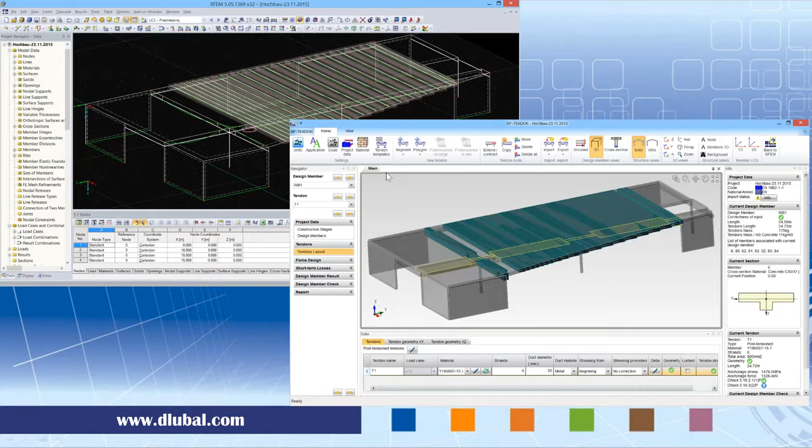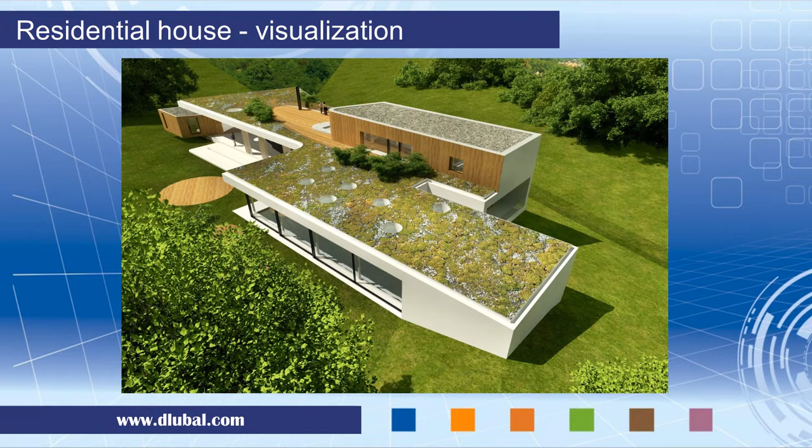When I was thinking of what kind of example I would show, I was inspired by this residential house. You can see the visualization of the house, which was built some years ago in the town of Zlín in my country. This is a family house, but a quite big one. The length of the house is about 50 meters, and the width is more than 25 meters. And I was involved in the analysis and design of this post-tensioned slab, which was part of the floor of the roof of this house. You can see now the tendons designed in the slab, and we can also see the final structure which was cast.

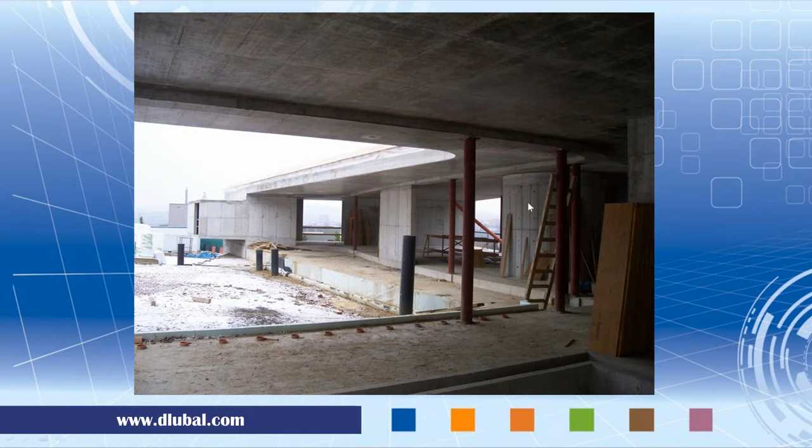It is quite a long span with a cantilever of more than 4.5 meters, and especially because of this cantilever we needed to use pre-stressing in this family house.

I will start my live presentation in RFEM. We will show what is necessary to start pre-stressing analysis in RFEM. So first of all, you have to define load case type pre-stressing and some load combinations, and also result beams and ribs and slabs.

I will switch into RFEM, and we see that if I go to load cases, I defined a pre-stressing load case here, in which we store not only the equivalent loads but also the results caused by the tendons, caused by the pre-stressing. Other load cases which I did in this example were self-weight, snow, and the roof.

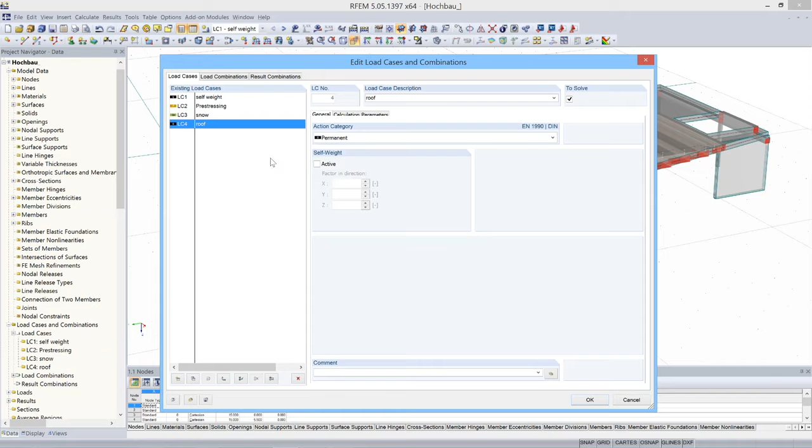In pre-stressed concrete, you should realize that your unit weight of concrete should be a little bit higher than 25 kilonewtons per cubic meter. Either you really calculate it based on the amount of reinforcement, or you simply use 25.5 or up to 26. So that's what I adapted.

Then we can see the combinations, and I defined several combinations. We can of course define more of them to make the analysis more powerful, but this is the necessary amount which I did. All types, ULS and SLS characteristic, frequent and quasi-permanent, are used for the design.

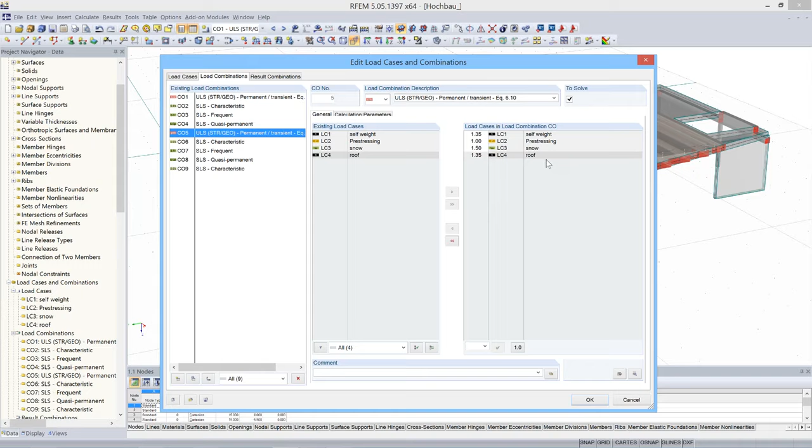And you can see that the first set of combinations contains only self-weight and pre-stressing. That's because we want to analyze the moment when the structure is pre-stressed before any other load is applied. Then I have a different set of combinations with self-weight, pre-stressing, snow load, and the roof. So that was it.

And last, which I want to show, is this model. You can see that I have defined some result beams, and the result beam, if I select one, is, I would say, a dummy member or fictive member defined in the slab. If I open this dialog, we can define the area from which RFEM integrates internal forces from the slab into this fictive beam.

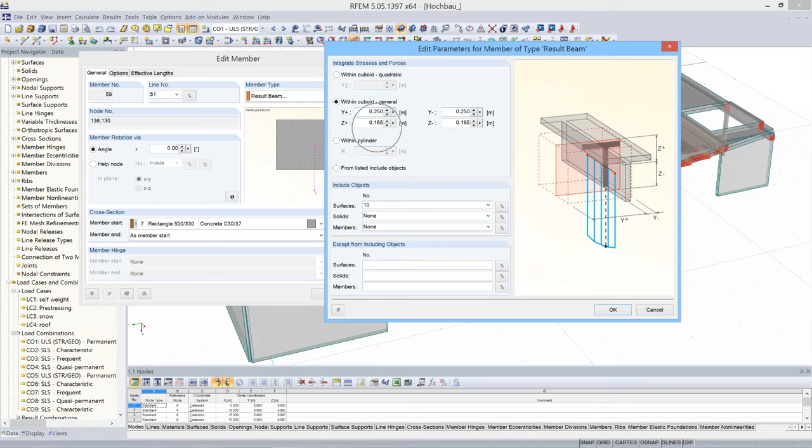So you define the depth of the cross-section plus minus and also the width. You can also define a different cross-section for the analysis and the design. As you can see here, we have these result beams here of the width half a meter, and here we have 1 meter. That's because the cantilever here is much longer, and that's why we needed more tendons.

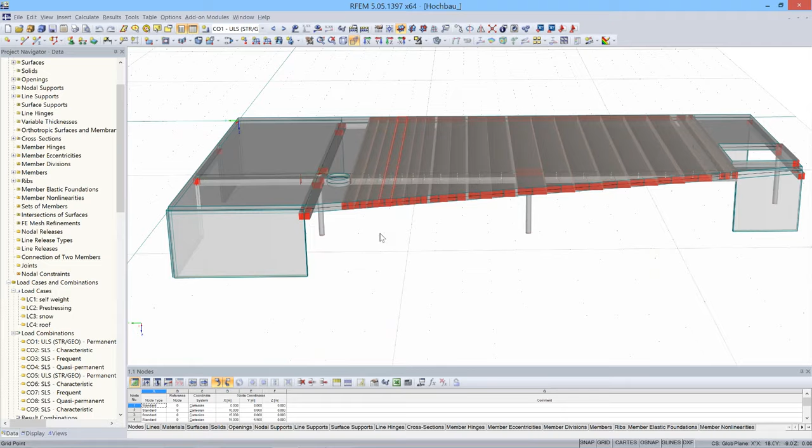If I switch into wireframe model, you can see these green lines, which are the tendons, and you can also see that the tendons are here distributed per half meter, and here the distance of the tendons is higher.

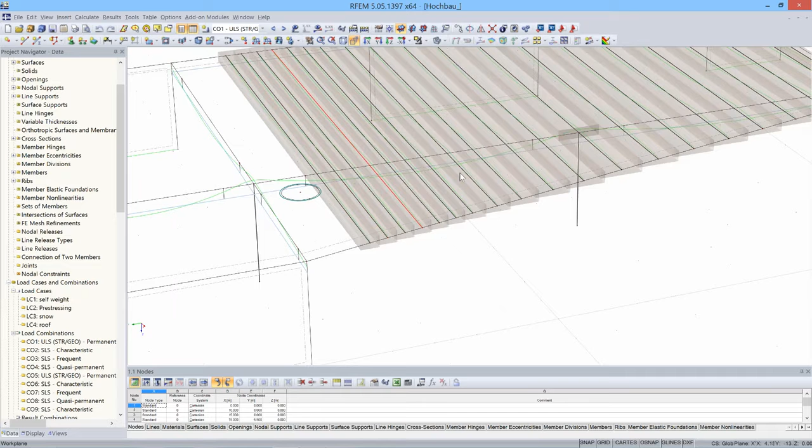The last one which I want to show is this beam and slab system. You can see here that I have a rib which is linked to the slab, and RFEM can integrate internal forces from a defined width of the slab together with the rib, and we can get a T-section, which is then used in the analysis and in the design.

So next, what I want to show is RF-TENDON and the functionality of RF-TENDON, like tendon geometry, pre-stressing losses, and effects of pre-stressing. All the data from the model is uploaded to the external module, and we will see this shortly.

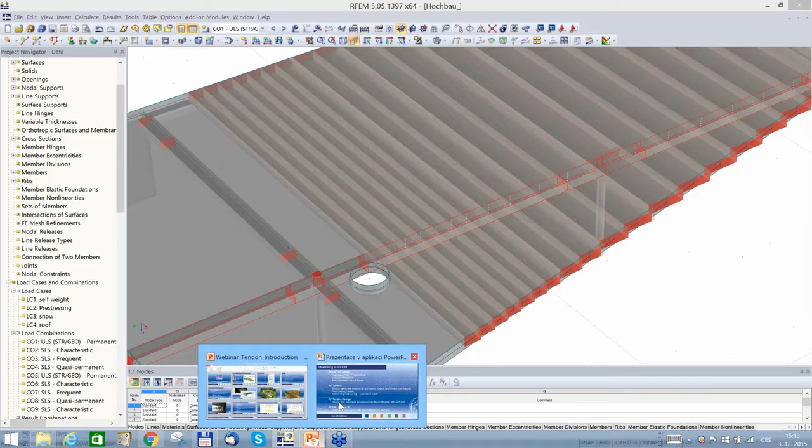After RF-TENDON, I will show RF-TENDON Design, and we also have the possibility to use all other functionality of RFEM, like the nonlinear analysis of the slabs and so on. We have it already here.

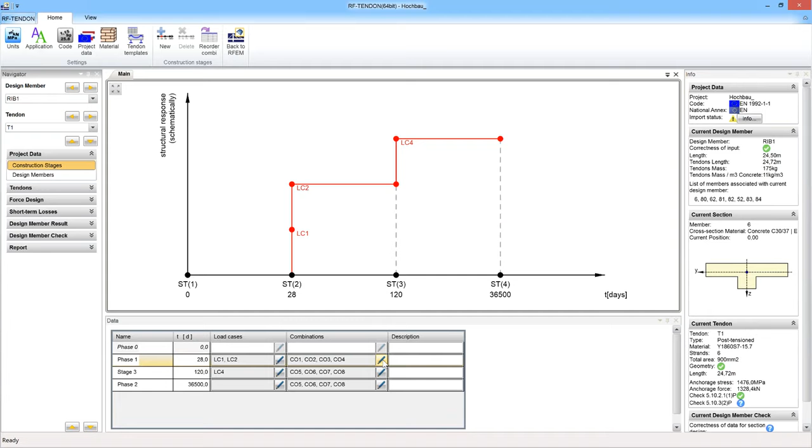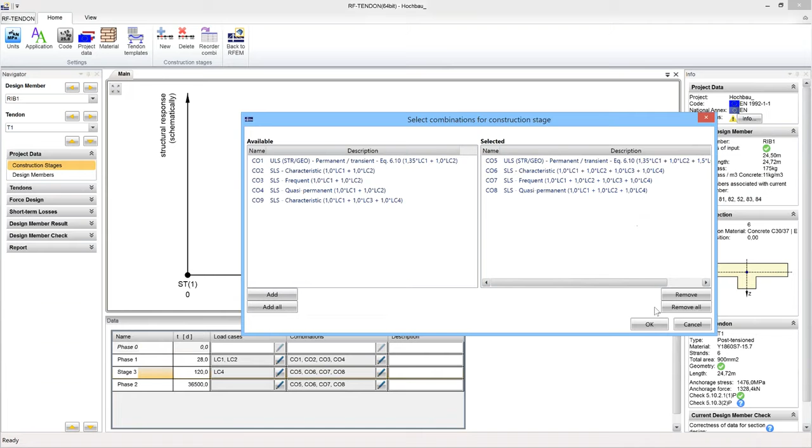And in the definition here, you can, of course, add any combination which contains those two load cases plus possibly some live loads. The other combinations are combinations 5, 6, 7, 8, which also contained the dead load caused by the roof. Then we can define the design members, and I already defined the member.

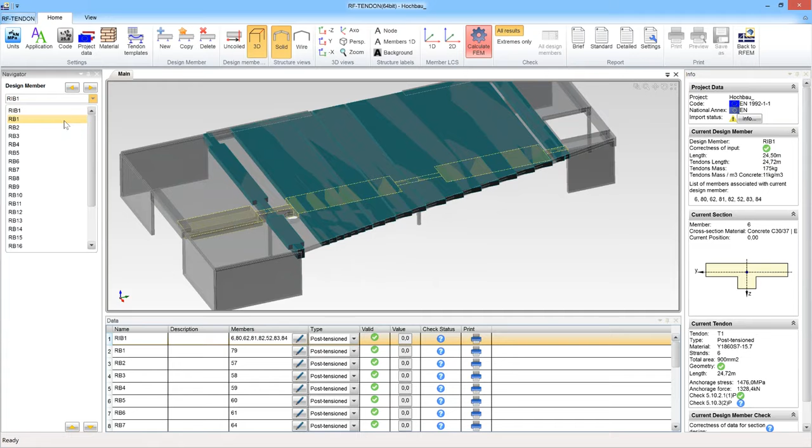I can show this 3D view, and you can see that I defined this beam and slab system with no slab above the supports and with effective slab width at mid-span. We can also go to any other result beam, for example this one, which we have defined in RFEM. You can pick up the members.

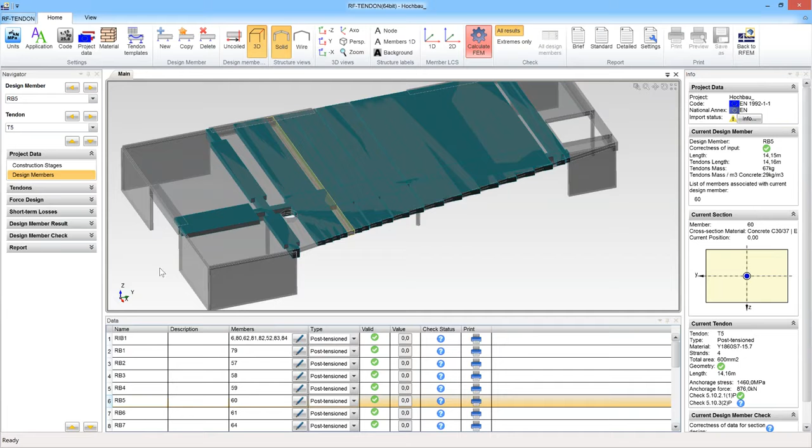You can see, for example, this rib is composed of many members. So if you edit, you can select the members from RFEM. In case you have a curved beam, we can uncoil it so that you can comfortably work in a 2D environment and analyze a 3D tendon.

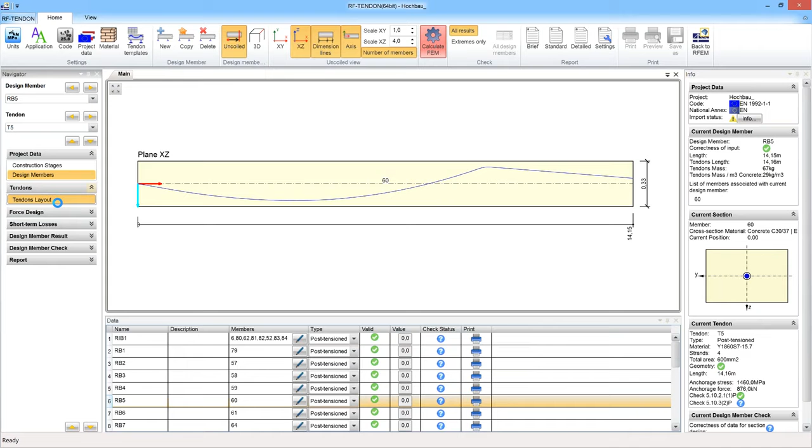In case of pre-tensioned beams, you define here in this dialog the parameters of the stressing bed. Then we go to tendon layout, and we can see now the XY and XZ projections.

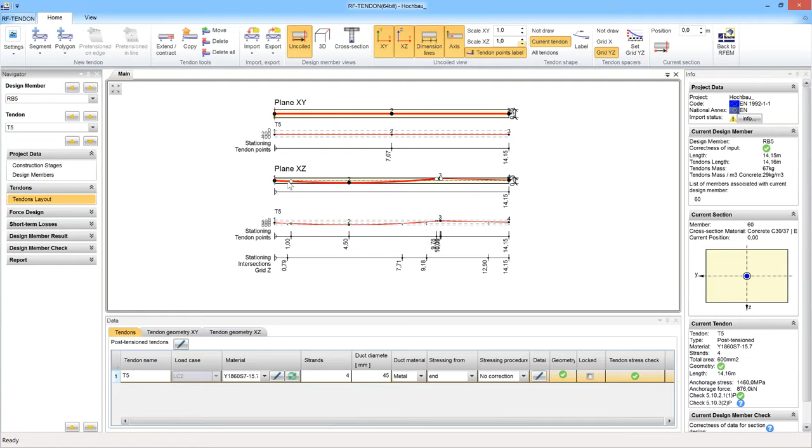And if I want to make the beam in the real scale, then it looks like this. This is the plan, and this is the longitudinal section. If I switch off the plan because I am not interested in that, that will be the straight tendon, and then I can scale it in vertical direction so that I can work with the geometry of the tendon comfortably and with no problem.

At the beginning, I define the material, number of strands, and also other properties like from which side we stress the tendon, material of the duct, and other things. But I can also select one point of the tendon, then I can switch into geometry XZ, and if I switch the drawing here, then I can get a nice explanation of the parameters, how this point of the tendon is defined. The distance is 40 millimeters based on the concrete cover.

From the formwork, this type of tendon geometry which I use is composed of two segments. Both are closing segments because there are only two. The first is parabolic and straight on the left hand side, and the last one is this one, straight on the right hand side.

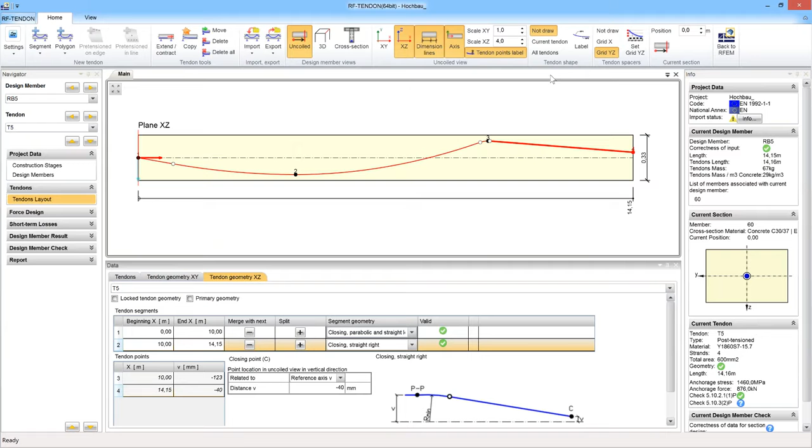The last thing which I wanted to show here is this drawing of the tendon along the length. Maybe I can switch on the labels, and then you can see that by defining these levels from the bottom of the beam, especially from the formwork, I can define the distance at which the spacer with specific depth should be placed. For example, the spacer which has 300 millimeters will be placed here at 9.18 meters. So the program calculates it for you.

That's it. By composing 2D and 2D geometry together, we can get this 3D geometry, and what's more, if the beam is curved, after we coil it back, we add this coiling to the 3D geometry, and you can have such a tendon. So you work in a 2D environment and you have a 3D tendon. And then we calculate the equivalent load, and we can display the load.

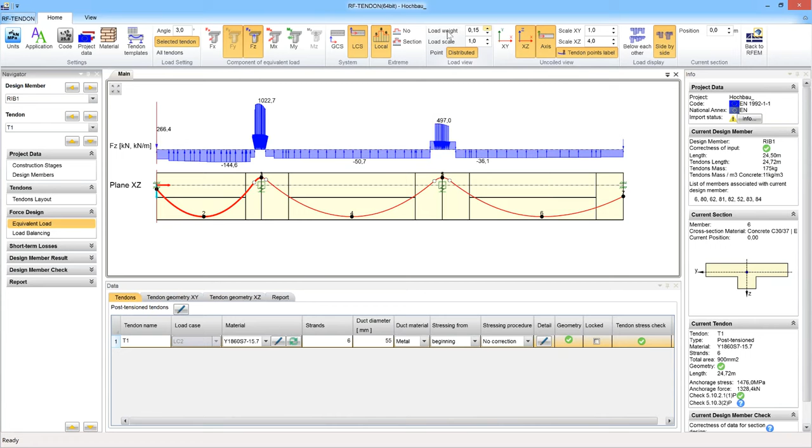Also, if I select the other rib, for example this one, then you can see that it is a little bit more complicated. You can play with the load weight. This is not a real scale. This is a real scale, because above the support we have a very small radius. So you see that intensive load above the support in this small parabola. But if we want to see this equivalent load better, then you use this load weight. All these settings on the ribbon are shown in the graphical tooltips.

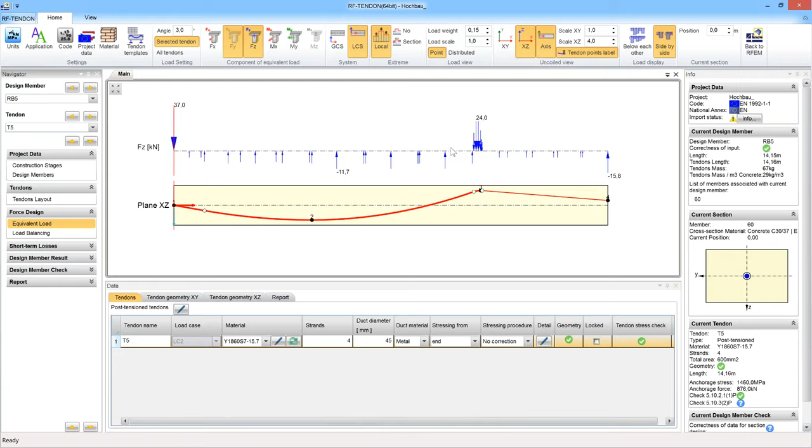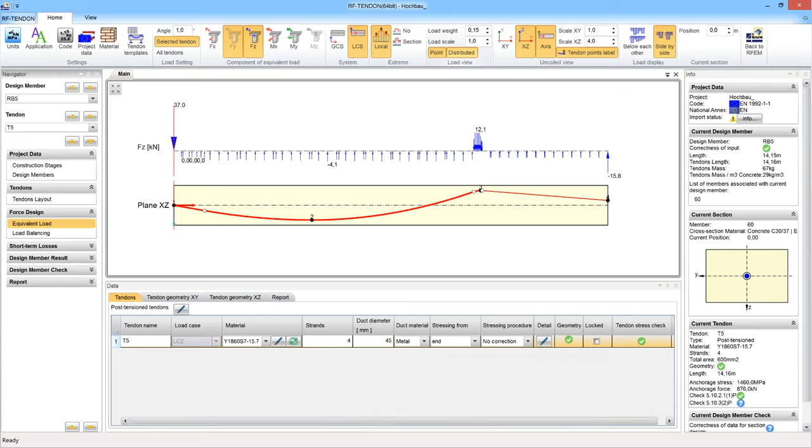If I switch back to this beam to have it a little bit simpler, then I can show that you can see not only distributed loads but also point loads, and this is calculated from the deviations of the tendon along its length. After we calculate this, we distribute it into distributed loads. You can also influence the precision by setting, for example, 1 degree here. The smaller the angle is, the more precise the equivalent load you calculate. But if it's too small, it makes the calculation longer, of course. I can keep 1 degree, and we get quite a nice equivalent load.

In some cases, for example in 1D elements, you can also use the functionality of load balancing for the design of tendon force. As we now have the slab, there is no direct load, I mean load per meter. We have load per square meter only.

So the functionality cannot be shown in here, but the principle is that you balance the selected external load, for example self weight, or you can also make the combination of self weight and additional dead load, and you balance it by the equivalent load caused by the pre-stressing. And authors like T.Y. Lin or some Swiss professors advise that you should balance approximately 100%, and if you design to the Eurocode, then probably a little bit more percentage of these dead loads.

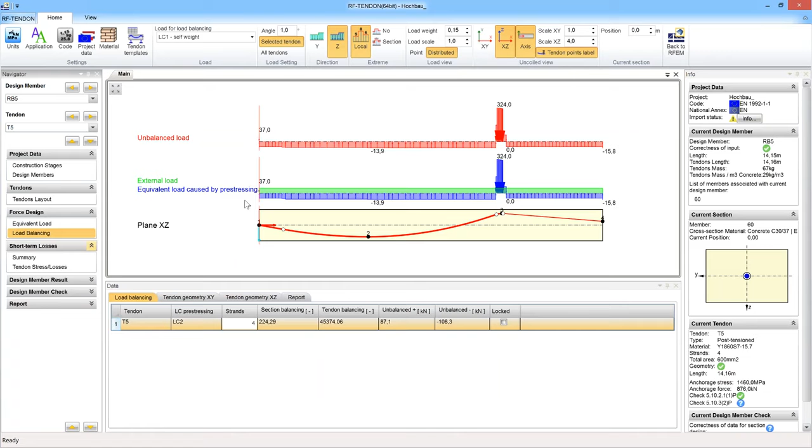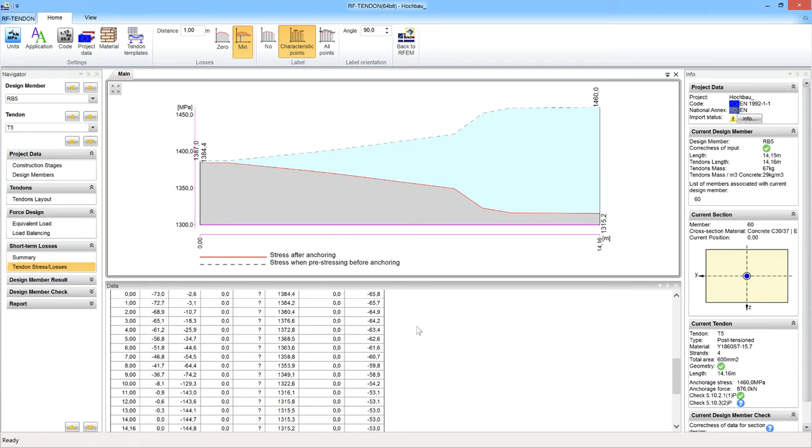After we have this defined, we can go to short-term losses. You can see these losses, also the checks of the tendon according to Eurocode and German Annex. You can also have the summary of these tendons, in which you can read and display all the necessary information, like minimum radius, the area of tendon, sum of lengths of straight and curved parts, cumulative angular angle along the length, and all these useful parameters.

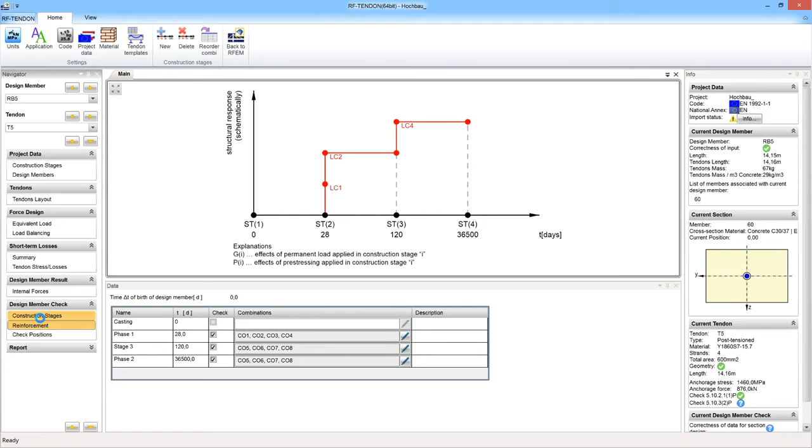Design member results can be shown if we calculate RFEM, but before I do it, I want to explain. This is again the picture of construction stages, which actually can be used if you have different age of the beam in your complex 3D structure. And here we have the reinforcement zones. I have defined the reinforcement, of course. You can see the tendon here.

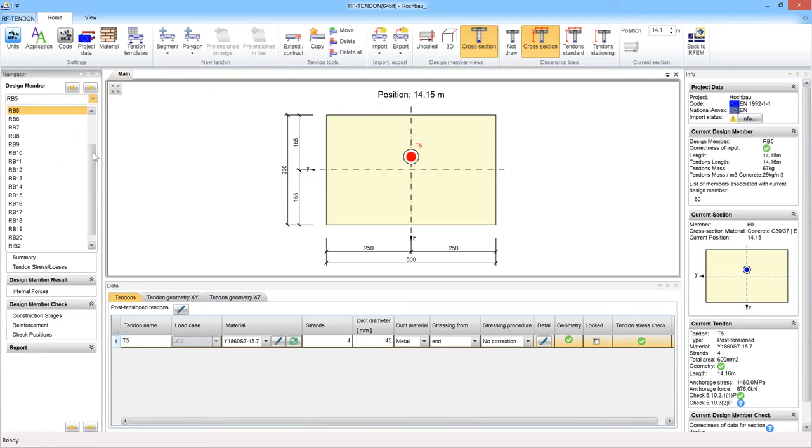Maybe I didn't show here in tendon geometry. Sorry about that. In tendon geometry, I probably should show this cross-section. You can see how the tendon goes by selecting the position of the tendon. Also, if I select the first rib and slab, and I go like this, you can see the change of the cross-section above the support. So we can check it. You can check it also in 3D.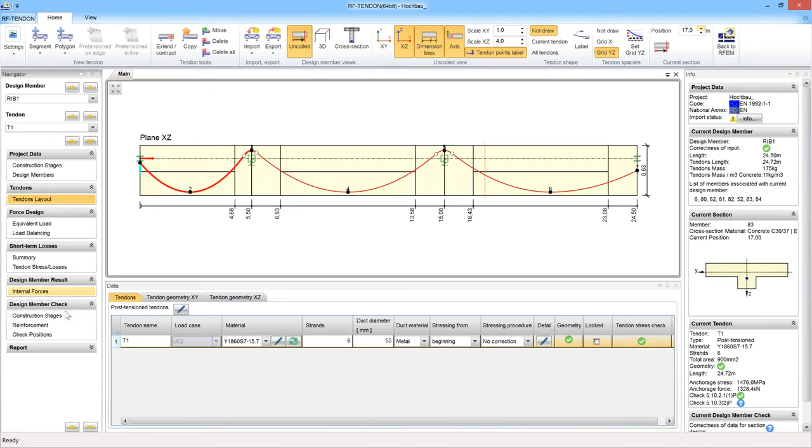Now I go back to the reinforcement. I switch into a more simple rib beam, and we define. Of course, we can add any number of zones. I believe that these can be sufficient for this case, and we can define the check positions, and in these positions we then check the cross sections. So I selected the positions above the supports and at midspan.

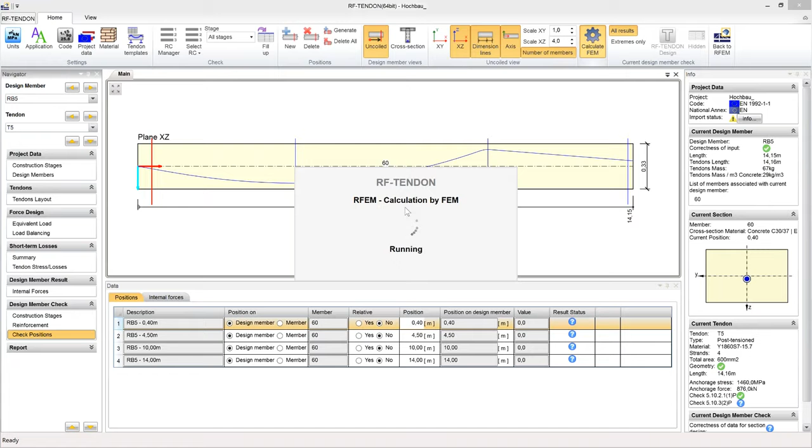Now I press the button calculate FEM. In fact, the external module uses the RFEM finite element engine, and we will get the results of all the load cases and combinations soon. It's not a small structure, but it takes reasonable time, so we will see it in a minute. And in the meantime, I will see if I forgot something.

So we went through the segments of tendon geometry. We explained all the possibilities of polygonal, and now it is finished. I finished this one. Export and import, pre-stressing losses, effect of pre-stressing, and all of these. Now we go to tendon design. We design the cross sections.

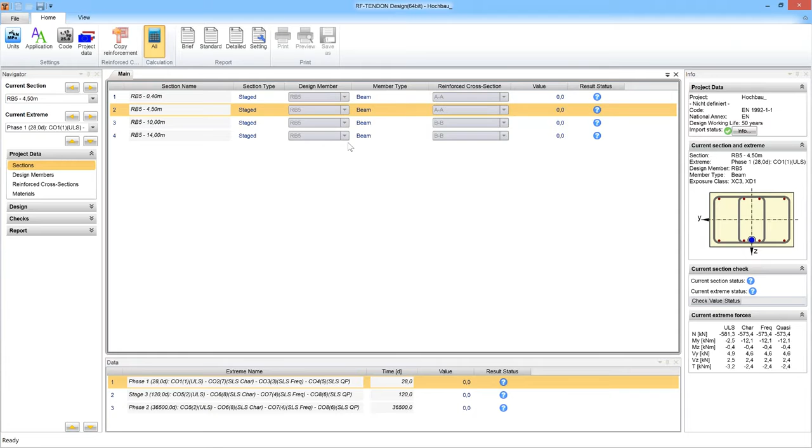In these pre-selected sections, we can go to RF Tendon Design, and all the data is prepared from the construction stages, from pre-stressing, and we find the cross section in selected sections, and then the data is generated. Now we have 4 sections. This is above the support. This is at midspan. Again, above the support, you can see it in the info window, and this is, I think, at the end of the parabola. I can calculate all these sections, and as I already designed it, you see that it is satisfactory, 99% above the support. Let's see some results.

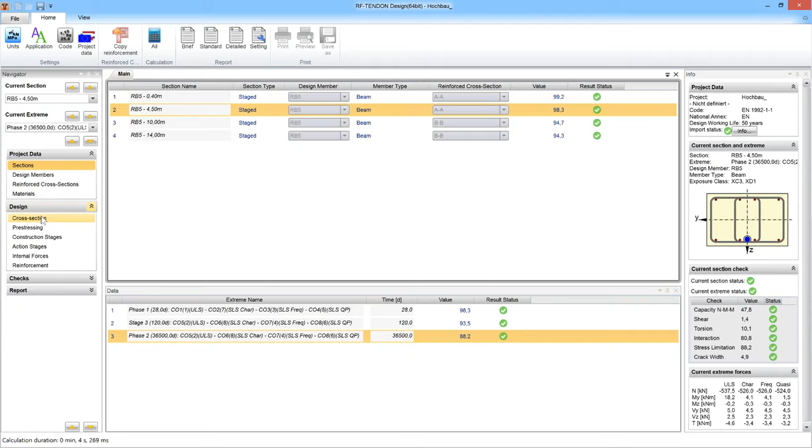Here we have individual construction stages. Stage at the pre-stressing, then when additional dead load is applied, and at 100 years. I will skip these data which in fact were filled in. You see, for example, these construction stages were uploaded from the module. You can see how it changes, but we cannot change it as it was imported from RF Tendon. But it is for your information.

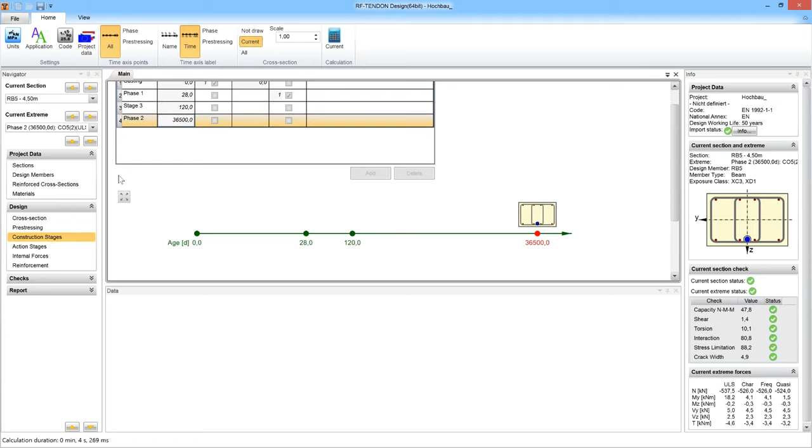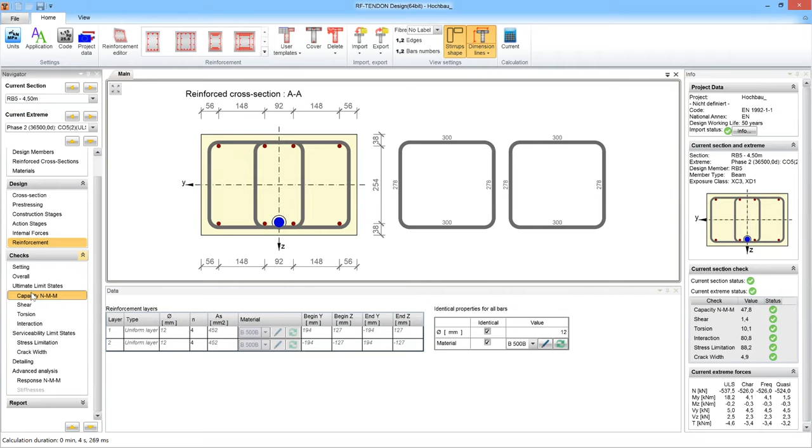Also action stages, internal forces, there are all the losses and forces shown, and here you would define the reinforcement. There are quite nice possibilities for the definition of the reinforcement, and you can see the reinforcement, how it goes. But let me explain these checks, concrete checks. First we have capacity, in which we show the capacity against flexure and normal force in an interaction diagram. Of course, you can see many possibilities on the ribbon.

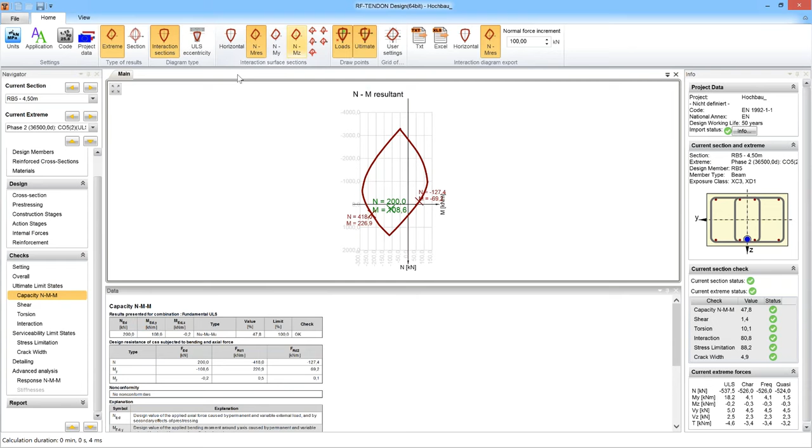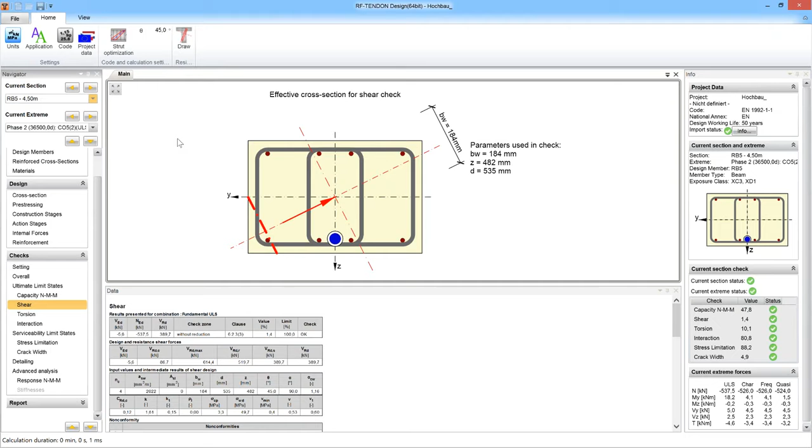Shear analysis. Here it is interesting, and I wanted to show you that if we are at midspan, then the longitudinal shear is even bigger than the vertical one. You can see the direction of the shear force, and also the effective width of the slab. So we need stirrups in both directions. If we select the section above the support, then you see that this direction of the shear force is vertical, and this one at the end is even bigger. This is almost completely horizontal because of the shear lag.

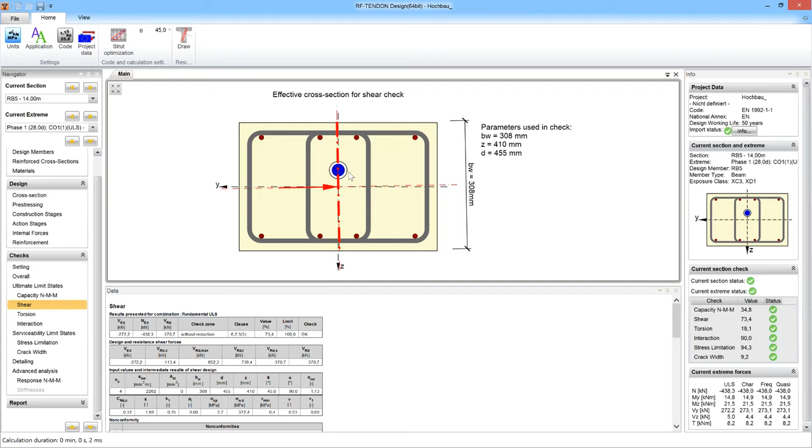If we apply a high normal force of pre-stressing, then of course just behind the anchor we should not use the sectional analysis. It is the anchorage zone, but I don't think I made it immediately after the anchor, and still RFEM integrates quite significant forces, but we can design them with no problem. So let's go back to the midspan. Oh, maybe I should have shown this torsion above the support, but doesn't matter.

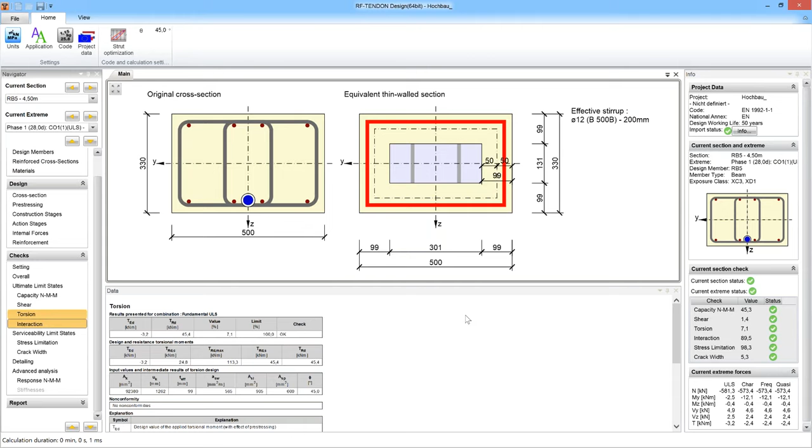We have also the possibility to analyze the interaction of all internal forces, which I will explain later, especially during the webinar. Stress limitation, concrete, pre-stressing reinforcement and non-pre-stressed reinforcement, crack width. Then some advanced, we have the possibility to check the detailing, but I switched it off. Here in settings you can switch it. Oh, this is not switched now, but sometimes you have to switch it off

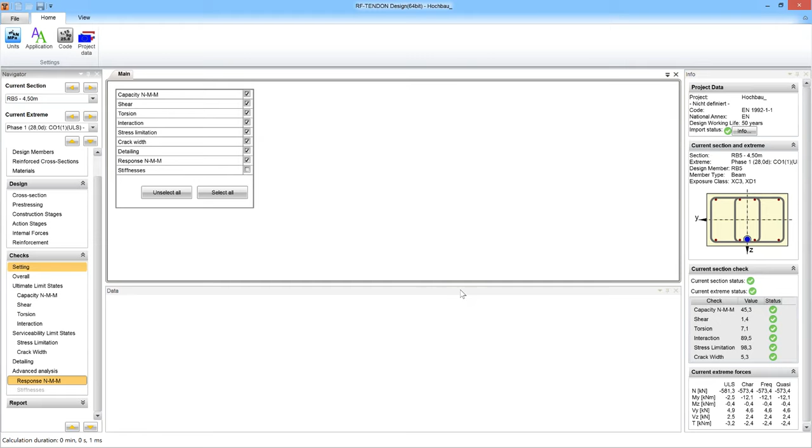because you do not provide a real reinforcing cage. And the response or stiffnesses, response I can show here, and you can use this response to show all these stages. So that was at 28 days. You can see that there is quite significant pre-stressing at bottom fibers. Then at 120 days we have some losses already, and also higher load. So this is smaller, and at 100 years it is even bigger difference.

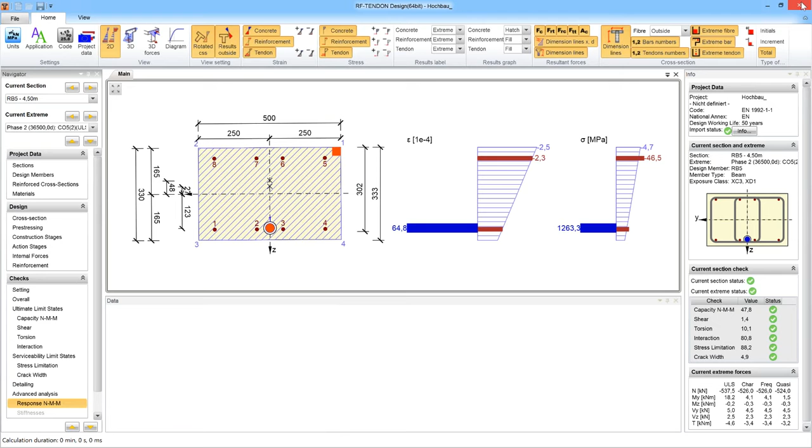When we are happy with the design, then we can go back to RF Tendon, and we can switch into, for example, this rib, which was more complicated with a complicated section, and again you define the sections which you really want to be analyzed and to be checked according to code, and the program again generates the data. In this case, I found a small problem with... I can calculate all with the stress limitation. You will see in a second.

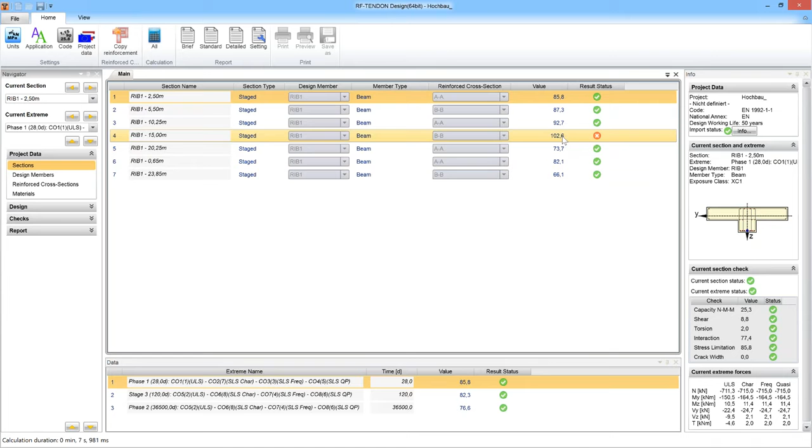So now we have here the progress bar, and it shows you it's already done, what calculation is being performed, and here we have 102. So how to check it? This is a section at 15 meters. You see it selected here, and the check which is not satisfactory, only by 2%, 2.6, is stress limitation. Then we go to checks, and you select stress limitation, and we see this is the fiber in which the ratio of stress and stress limit is critical, so is extreme.

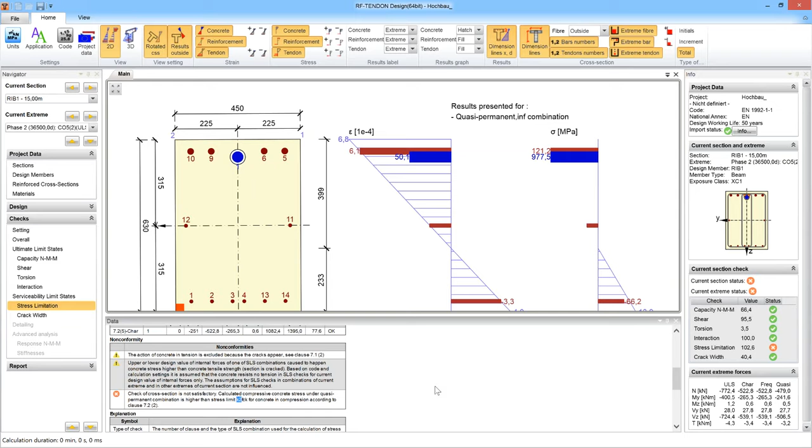We can also make this bigger. There is 13.9 megapascals, and it should be 13.5. The program tells you exactly what is happening in the cross section, and sometimes, if it's straightforward, it gives you some non-conformity. For example, check of cross-section is not satisfactory, calculated compressive strength under quasi-permanent combination is higher than stress limit, and so on.

You can either increase this K2 factor in case, for example, that it happens during the pre-stressing in the fibers where you have the pre-stressed tendons. Then due to the fact that you measure all the forces in the tendon, you can afford to decrease R sup and R inf factors. But in this case, it is at the end, you can see that it is the phase at 100 years. And in this case, either we say, okay, 2% is not that big problem, or we would have to increase the depth of the cross-section, or we can also increase the concrete grade.

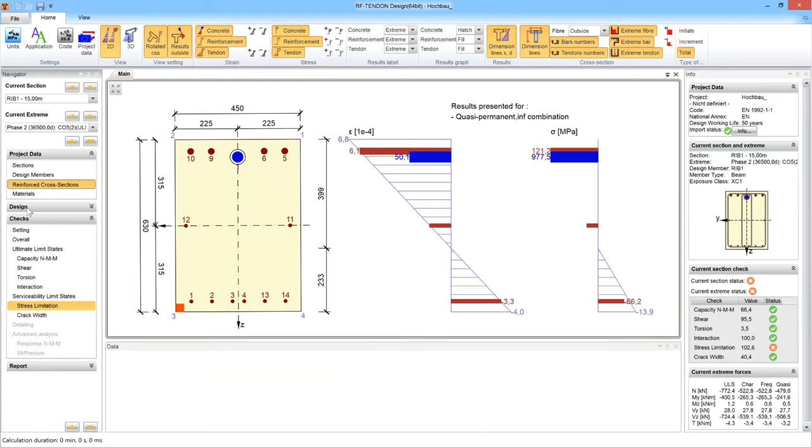The other possibility would be if we go to design and reinforcement, then I can select, zoom all. I can select this layer, and instead of diameter 12, I can try to use diameter 14, and I calculate current extreme, and I see that it is only 0.9%, so we can play with it. Maybe diameter 16 would be okay, and it seems it would.

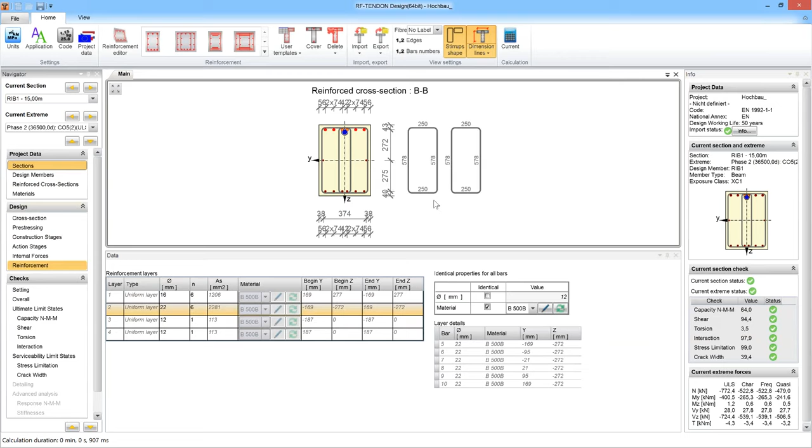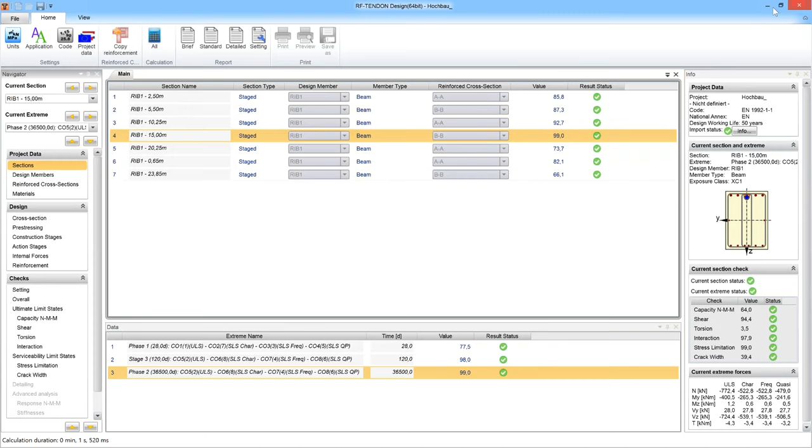So if we go back to sections and we calculate all, because all the data of that reinforced cross-section was deleted, then we see that the rib in this case is satisfactory. Maybe we can go through all these navigator items, but I would prefer to finish the example, and we can concentrate on that in some other webinar or seminars. Of course, we can generate reports both in RF Tendon Design and RF Tendon, but I think as the example it was enough, and we can go further.

So I explained the design, or I would say sectional assessment or sectional check in result beams and ribs, but you might object that this is a 2D member, this is a slab. Then, of course, once you have designed these 1D fictive members, then you get some non-pre-stressed reinforcement as an additional reinforcement, which has to be put into the slab. And you can also use the functionality of this external module, which puts the equivalent loads back into RFEM as upward loads.

And now you have one load case, like for example self-weight, which acts downwards, and of course pre-stressing acts upwards, and you can perform the analysis of 2D members, I mean 3D structure with the slabs, and you can also perform 2D design directly in RFEM. And after you have this potential additional reinforcement, additional to the one which we found in result beams, then you can also perform this non-linear analysis of 2D structures, 2D slabs. We definitely will show it during the seminars.

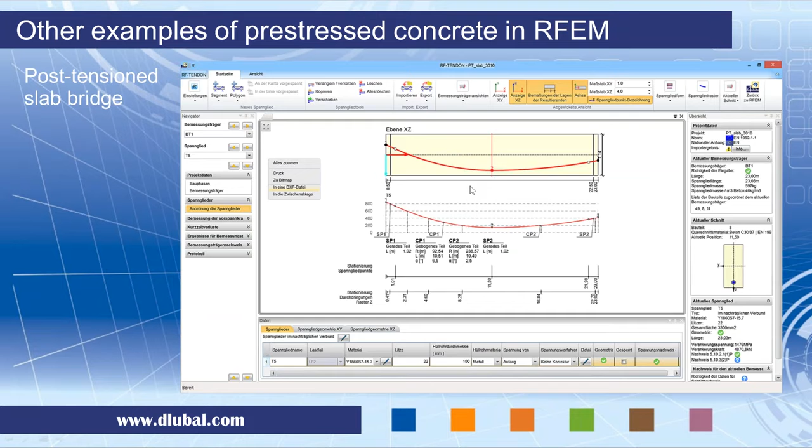I defined it exactly according to that textbook, and then we can get the results in RFEM back. This is the effect of pre-stressing and the upward deflection, and this view from the bottom of the bridge.

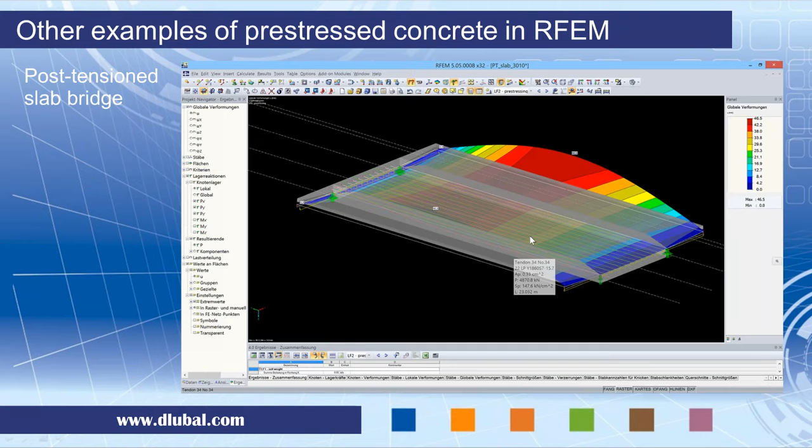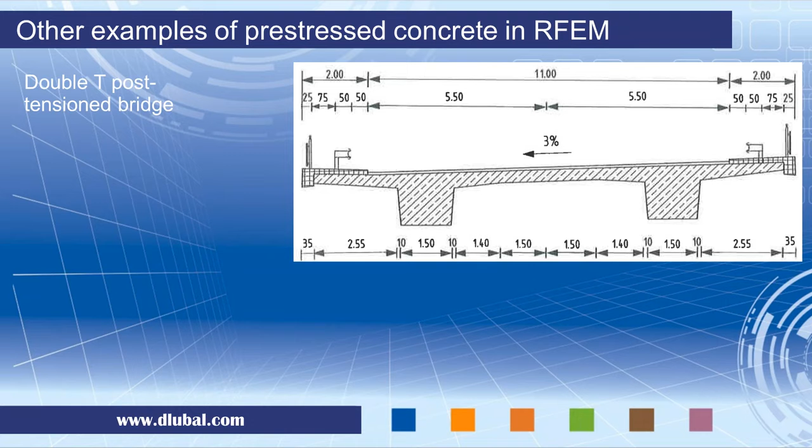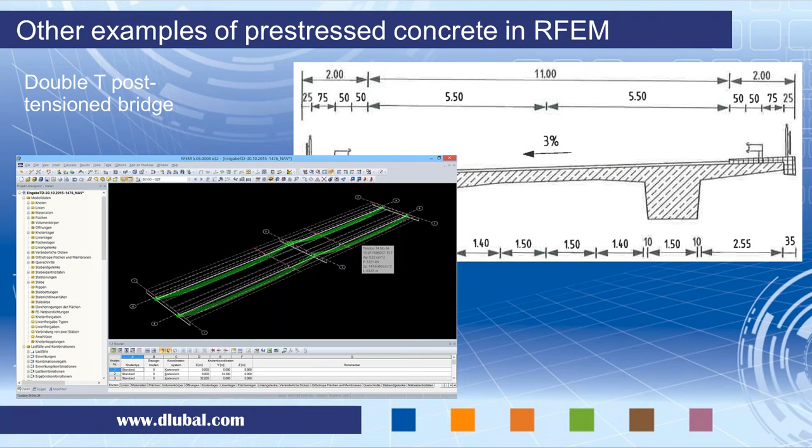Another example which we made, actually Adrian Langhammer input, is a double T post-tensioned bridge. This was from a German report which I do not remember the name, but Adrian then can tell us. This double T post-tensioned bridge was modeled in RFEM as two independent beams which were linked together by an orthotropic slab. The slab had zero stiffness in longitudinal direction, because in longitudinal direction we had these beams, but it has some stiffness in transverse direction to make sure that those beams share the load applied only on one of them. So that was the model.

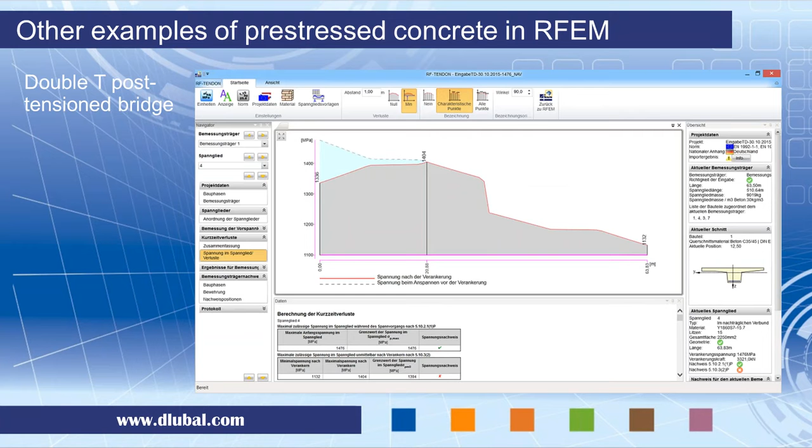Of course, we designed, you might have seen in the previous picture, the tendons. We designed the tendons and calculated losses and all other checks. You can see the checks in RF Tendon Design. First was a flexure check, and then shear, and also here the torsion check. I haven't mentioned that this equivalent thin-walled section is calculated automatically.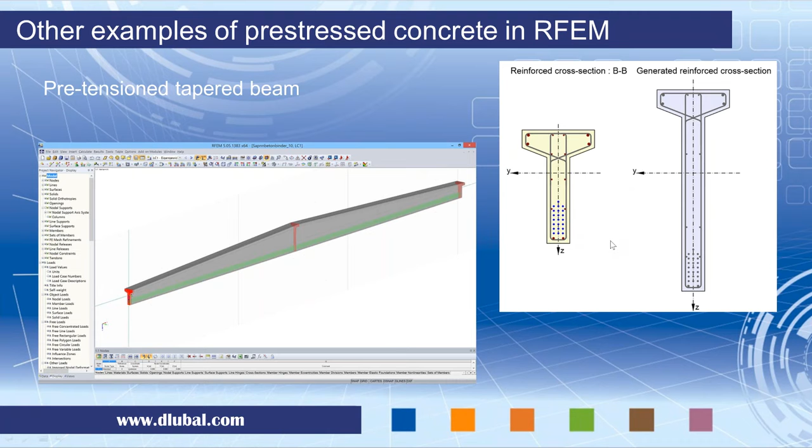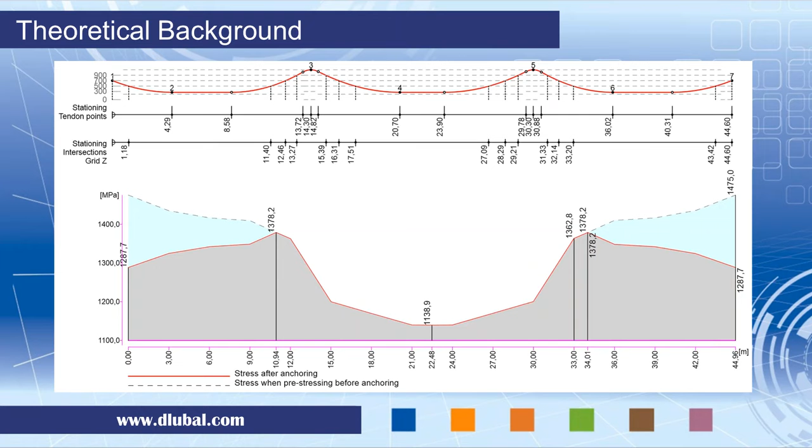After we showed all these examples, I would like again to indicate some topics which I would like to address during the seminars. So it is a kind of theoretical background. Definitely we will be speaking about the losses. This is a picture of the longitudinal profile of the tendon and frictional and anchorage set losses.

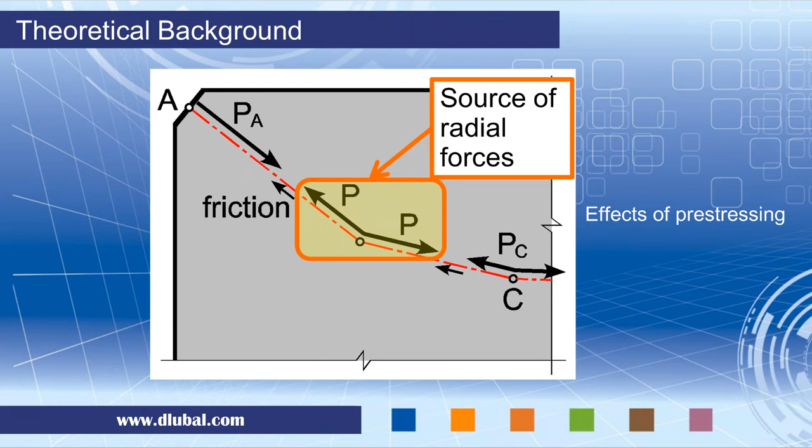Then we should be talking about the background of sectional design. We see ultimate limit states and serviceability limit states, all the list of the checks. Anyway, you saw the possibilities in RF Tendon Design, and here you can see also the German and Austrian flag. So we have national annexes of DIN code and ÖNORM.

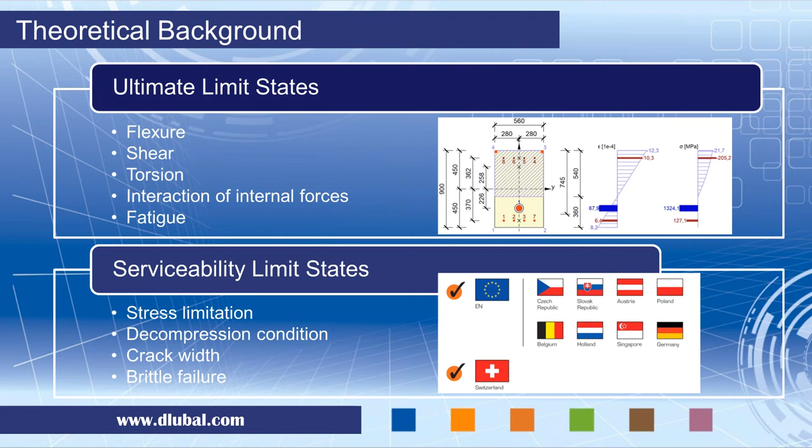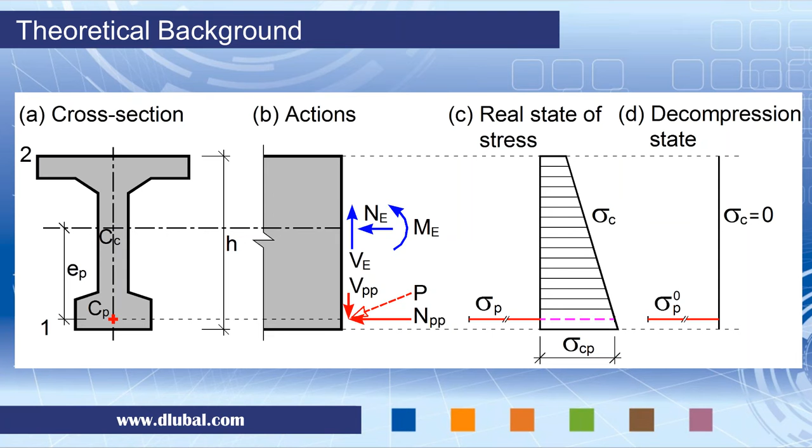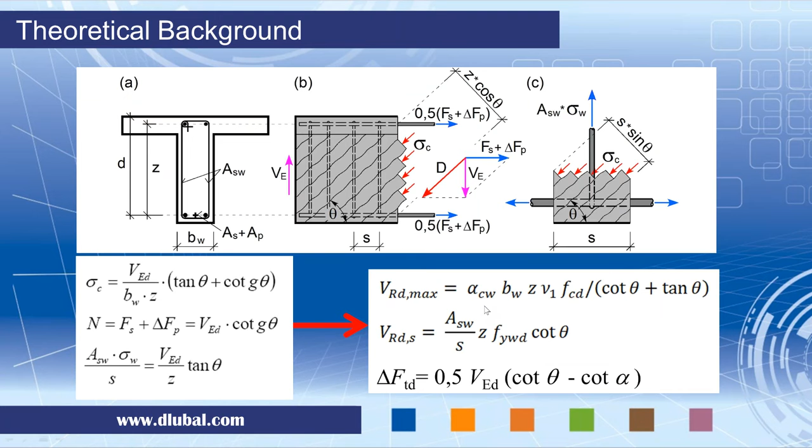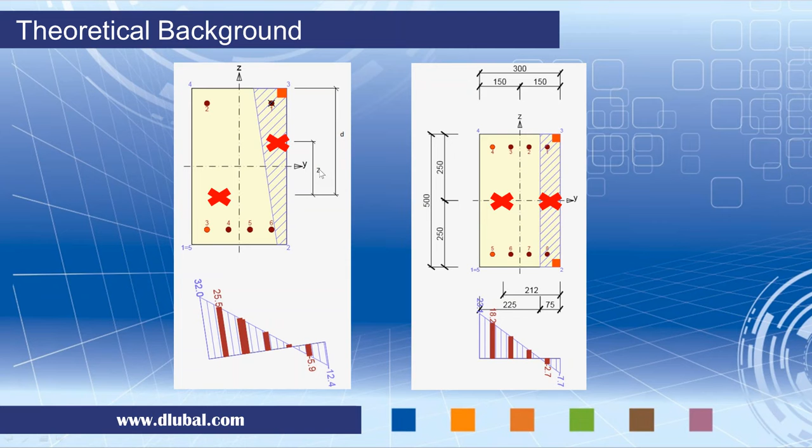For the analysis of the sections loaded by bending moments and normal forces, we will discuss the methods. First, the decompression state method, but also the initial state method, which we introduced in RF Tendon Design. We will touch also the shear analysis, the equilibrium conditions, and how from these equilibrium conditions the Eurocode formulas are derived. And what is the role of the lever arm caused by the flexure in the shear analysis? That will be also a topic.

And last but not least, we have a nice feature of interaction of all internal forces. You can see all internal forces here, and this is just the explanatory picture how you can combine shear force and bending moment.

I will select this one. This is a little bit simpler, and I go to tendon layout, and you see you can draw the current tendon, for example. You can set the labels, which show the radius, length of the parabola or part of the tendon, and cumulative angle. And I will switch this to here. So now you can prepare it. You can also change the grid. It is here. You can define either equidistant or non-equidistant levels. I do not want to go further.

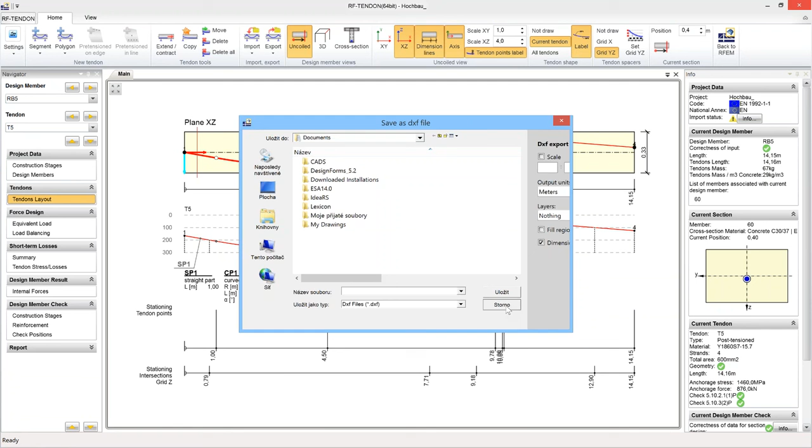But after you are happy with the picture which you produced, then by pressing the right mouse button, you can go to DXF file. Okay, you export it as a DXF file. So it is possible, and you have a nice draft drawing already. You can also draw all tendons. If you have more tendons, you can draw one tendon after the other, but in this rib beam we have only one tendon, so we cannot show it. Okay? Okay, great. That seems to be quite easy.